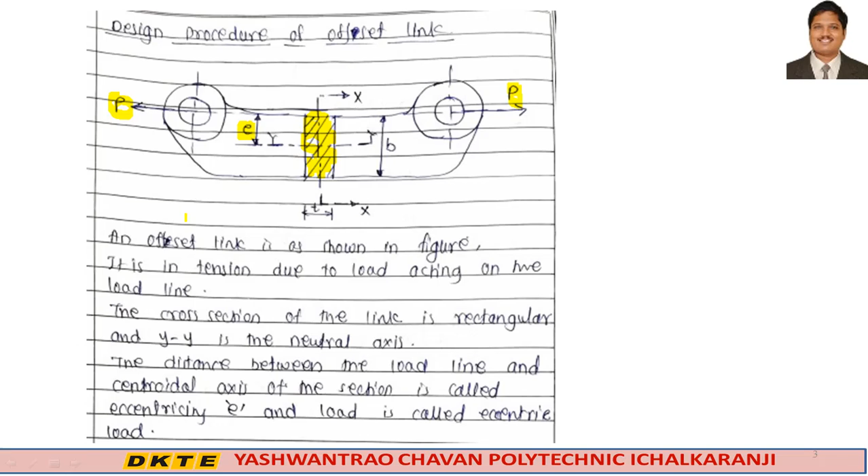Since the load is eccentric, the bending stress is induced in addition to direct stress.

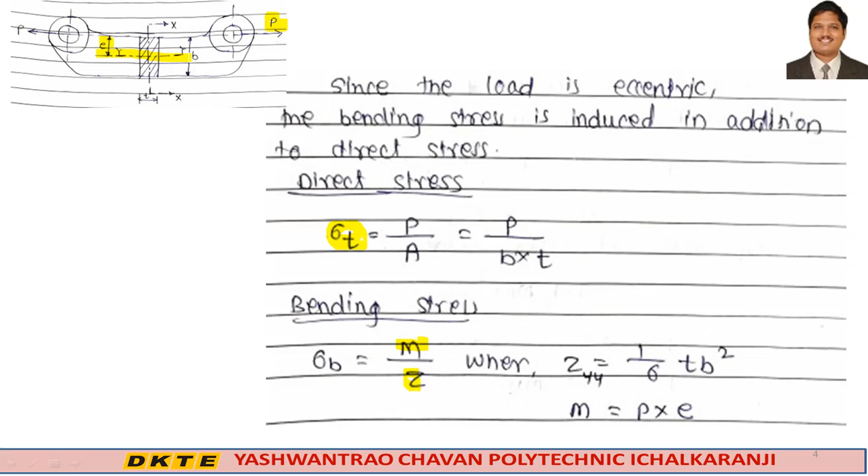Bending stress sigma b is equal to M by Z. M is the bending moment, Z is the section modulus, where Z about YY is 1 by 6 into t b square, and M is P into e. P is the force applied, e is the distance from the neutral axis. Therefore sigma b is equal to P into e divided by 1 by 6 into t b square. Simplify this equation like this.

Maximum stress or resultant stress: we know that sigma max is equal to sigma t plus sigma b. Put the values of sigma t and sigma b. From the above equation, b and t can be obtained.

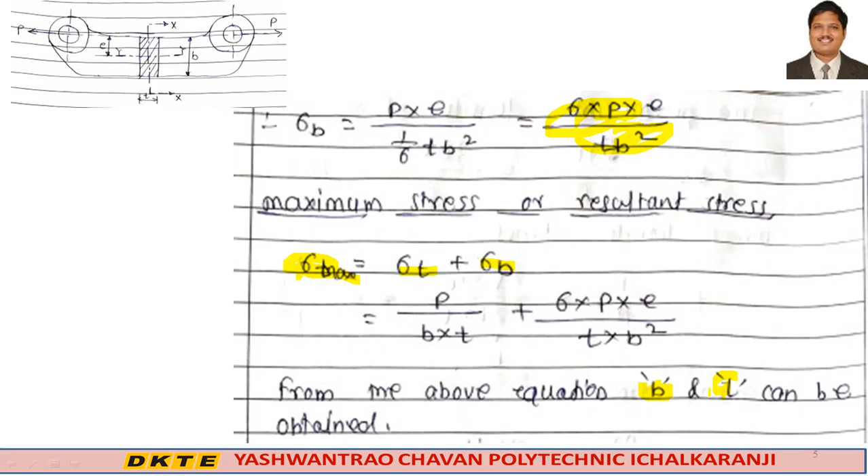Let's see one problem. An offset link is subjected to a force of 25 kilonewton, meaning P is given, as shown in the figure. The figure is also a part of the question. It is made of grey cast iron FG300. This is the designation of the material. From this designation we should know its stress value, and the factor of safety is 3. Determine the dimensions of the cross section of the link.

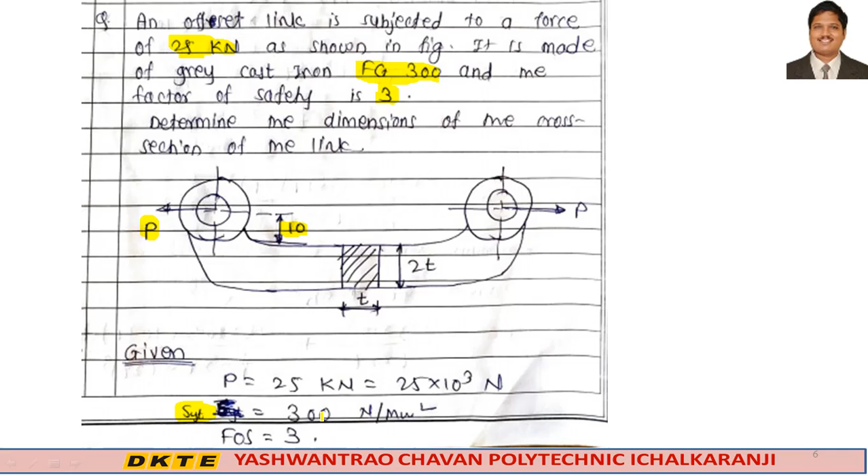This is the figure. Cross section 2t into t. 10 is the eccentricity, P is the load acting on the member. From FG300 we know that Syt, the yield stress, is 300 Newton per mm square. The permissible tensile stress from the factor of safety: sigma max is equal to Syt upon factor of safety, 300 upon 3, meaning 100 Newton per mm square.

Direct tensile stress sigma t is equal to P upon A. Put the value of P given in the question. Put the value of area; 2t is given in this question as b.

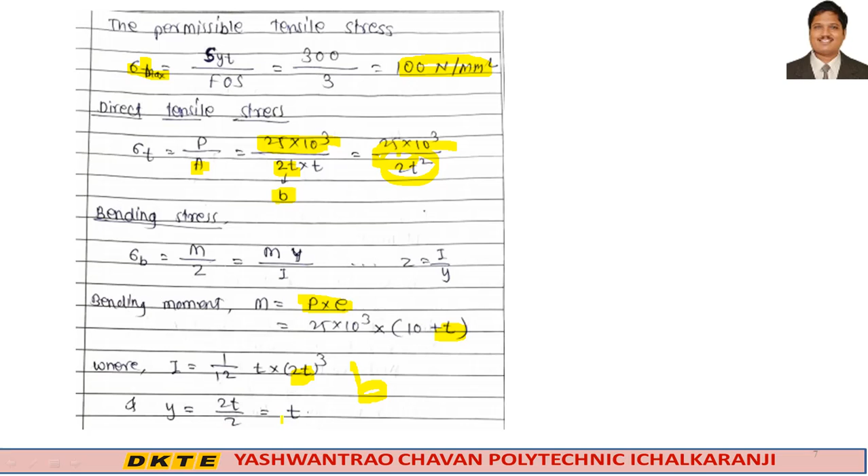Now put the values of M and I in sigma b. After putting, maximum stress sigma max is equal to sigma t plus sigma b. Put sigma max as 100, put the value of sigma t, put the value of sigma b. Simplify this equation. After simplifying, we get this quadratic equation. By trial and error or by the quadratic equation method, we find small t equal to 25.5 mm.

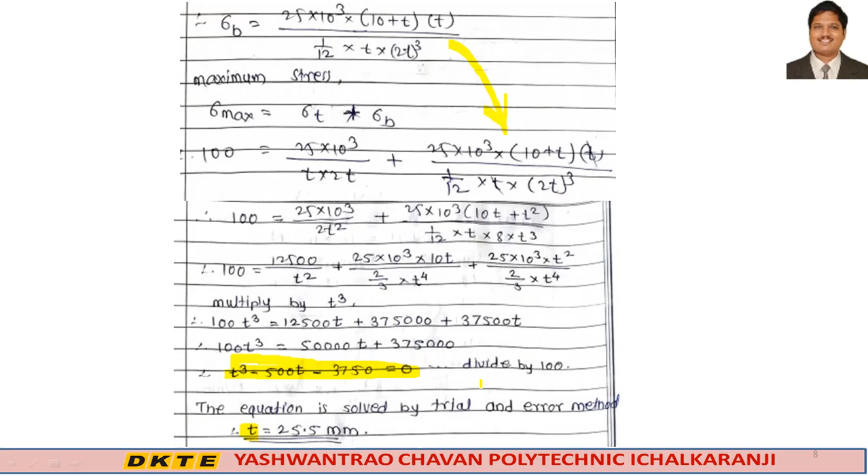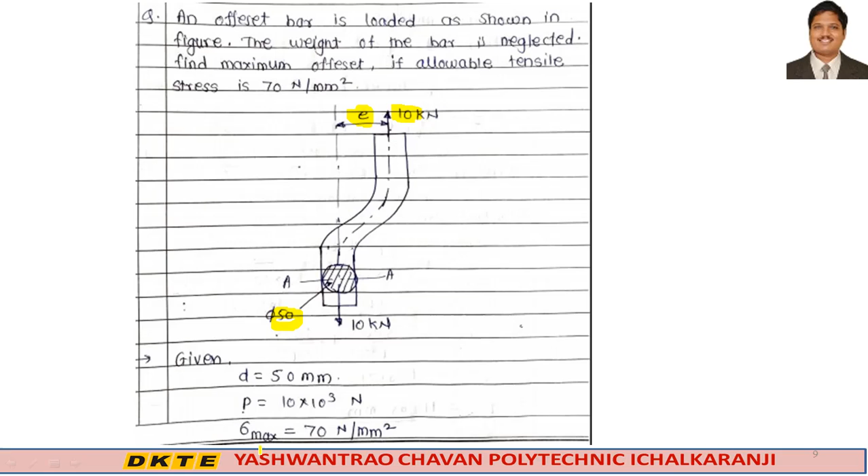We will now see another problem on the offset link. An offset bar is loaded as shown in the figure. This figure is also part of the question. The weight of the bar is neglected. Find the maximum offset if the allowable tensile stress is 70 Newton per mm square. Here this is the eccentricity. Load is 10 kilonewton, diameter of the bar is 50. Given diameter, load and stress 70 Newton per mm square.

Direct tensile stress at section AA. Sigma t is equal to P upon A. Put the values of P and A; we get sigma t as 5.092 Newton per mm square. Bending stress sigma b is equal to M by Z. M is force into distance, P into e. Put the value; M will be in the form of e. Next, Z is equal to pi by 32 d cube. We get Z here.

Then put the values of M and Z in sigma b. We get sigma b equal to 0.8145 into e Newton per mm square. Maximum or resultant stress sigma max is equal to sigma t plus sigma b. Put the values; e is the unknown. We get e equal to 79.70 mm. This is the problem on the offset link.